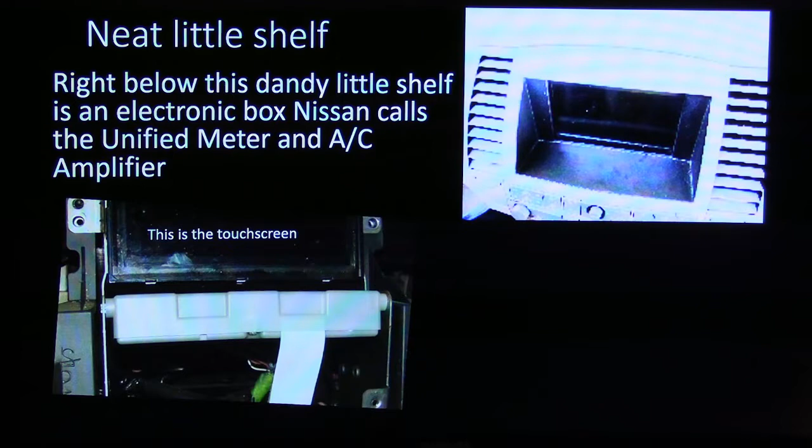Here's the touch screen, and when you pull this apart, there's this little very important electronic unified meter and AC amplifier box that's right underneath that screen, and facing up on that thing there, see, that's the meter. Now facing up there is a hole that's just the right size for a penny or a dime to fall through. It's funny because the Nissan mechanics for years called this thing the piggy bank.

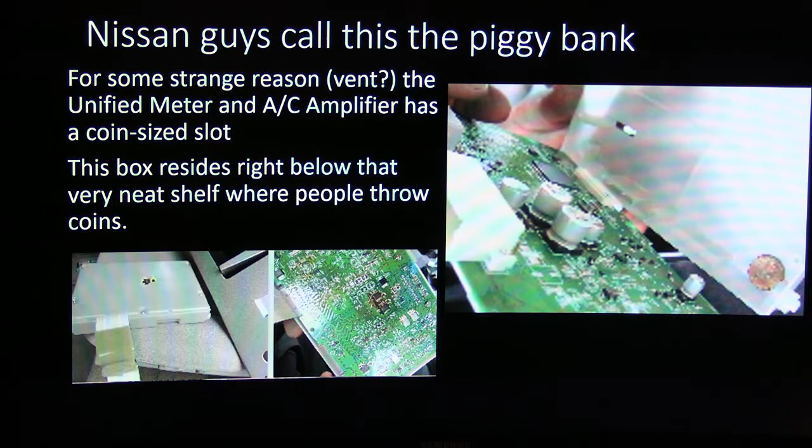That's where the coins like to fall. Now right below that little neat shelf, it's a perfect place for that stuff to fall through. And that's when it shorted out some of the circuits, and it made a burn place on there. You could smell it and all that. And there's the penny that was in there. That's a smoking gun in and of itself.

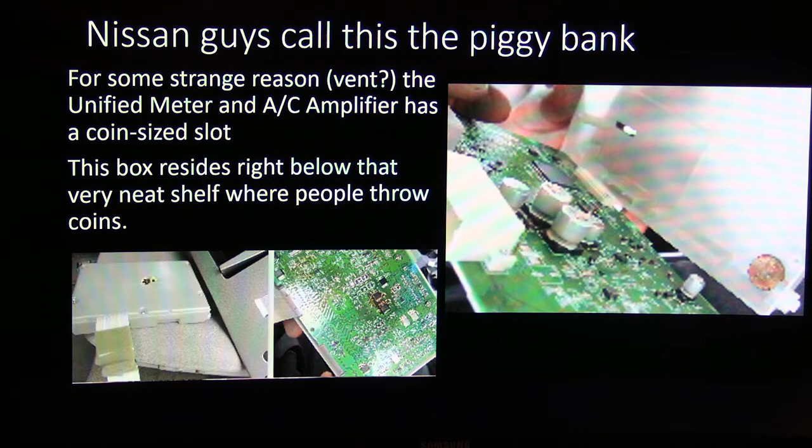Don't mind the pun. All right, so the replacement part comes from Nissan with a piece of thin cloth tape over that hole. I thought that was interesting. They knew that there was a kind of a problem there, so they went ahead and did that. It's a pricey repair. Only costs pennies to generate the repair, though, so to speak.

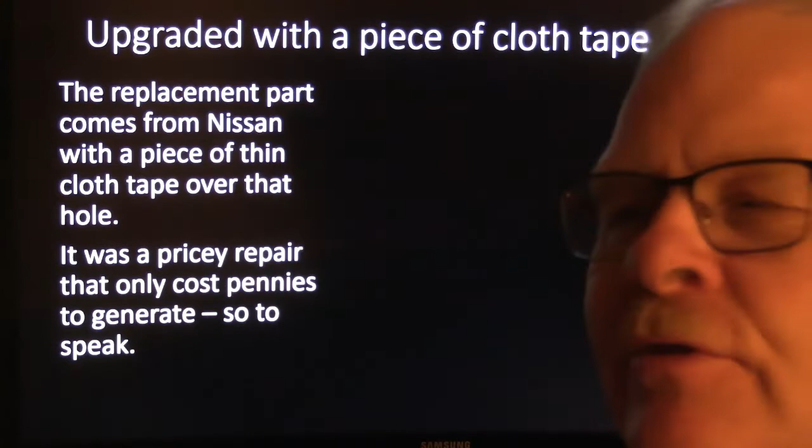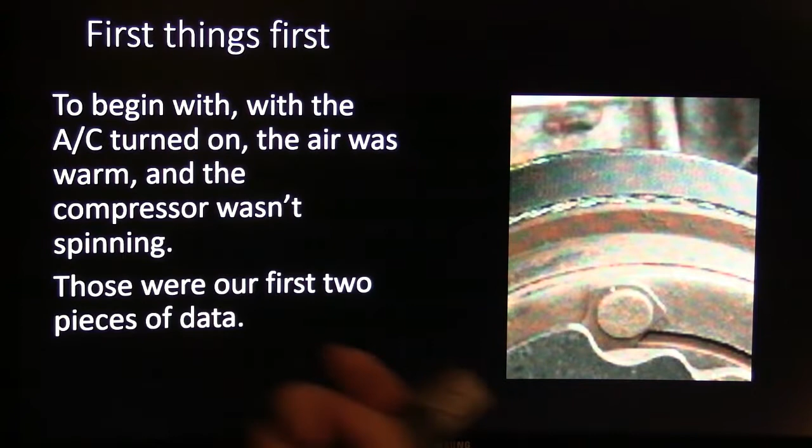Now, Terry called me one day to tell me his '07 CRV had an inoperative AC. He dropped the Honda off a couple of days later after I told him to bring it on in, and the AC had just died on him, just quit working. Sometimes they do that. And to begin with, we turned on the AC, the air was warm, the compressor wasn't spinning. That was our two first pieces of data.

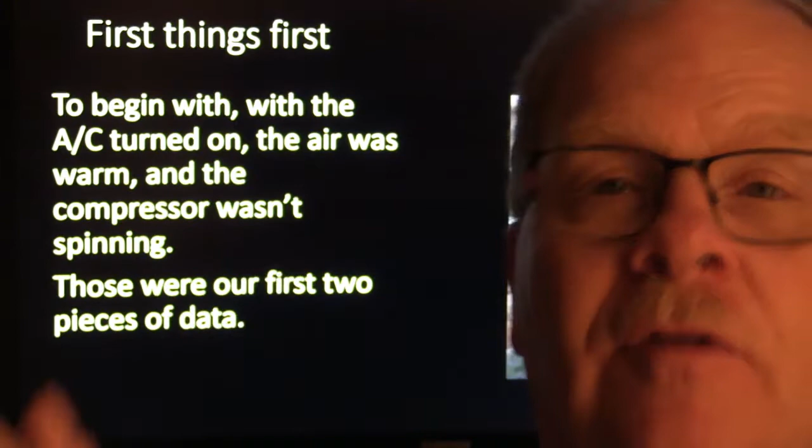See, every time we do troubleshooting, we're going to gather information, and we're going to sort it out, and we're going to see where it leads. It'll either lead us to a repair, or it will lead us to look for more data, and that's what we needed to do in this case.

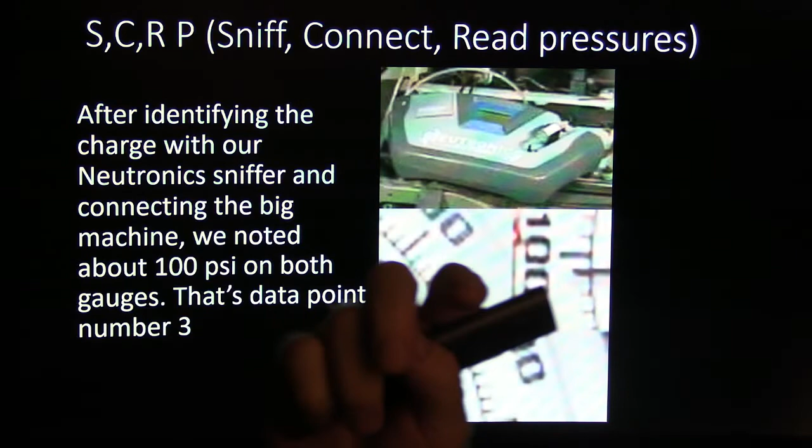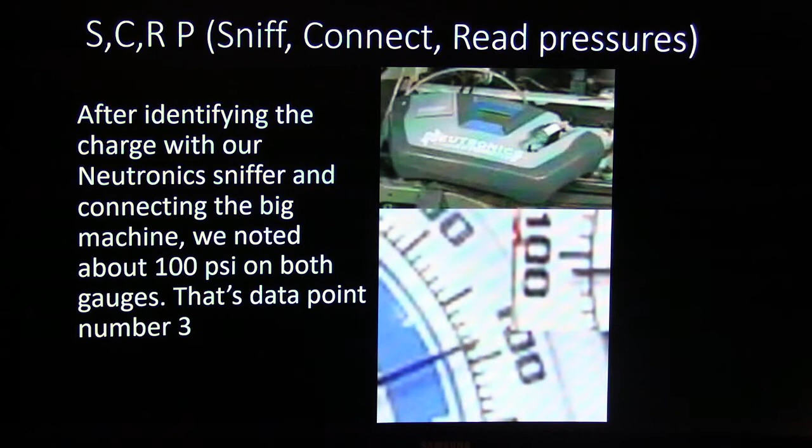Now, after we identified the charge with our Neutronics sniffer and connected the big machine, we pulled up about 100 psi on both gauges. That's data point number 3. So we knew that we're blowing warm air, we knew the compressor wasn't running, and we knew we had 100 psi of static pressure. Now the low pressure cutout switch should have allowed the AC compressor to kick on if it was good.

Alright, so now you will not see a schematic like this on this vehicle anywhere else on the planet, because I created this yesterday. What I typically do is I take pieces of the schematic as they're published and I actually move them around so that I can put them all on one page if at all possible.

So we eliminated a refrigerant problem, and our preliminary conclusion was the compressor's failure to engage was not related to low charge pressure. I should have said to move this to the back so that was wasn't hidden right there, and I see that now.

So basically we got our blower motor relay here. We've got the PCM measuring pressure here. We got the second ECT sensor there, and there's a ground here. See, this is both a PCM, that's why they've got the dotted boxes.

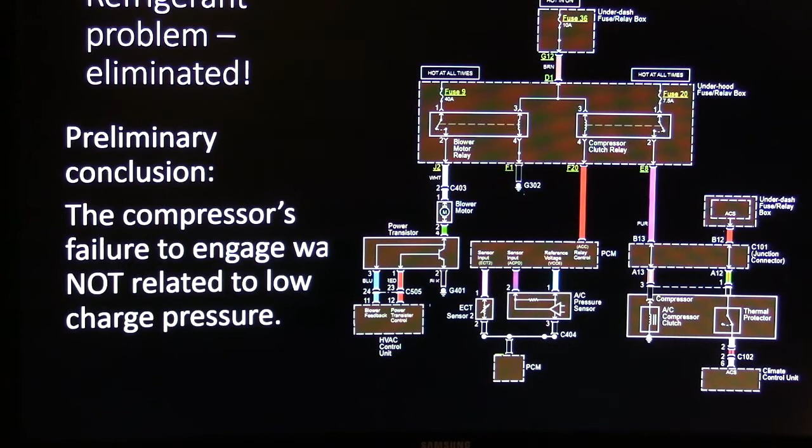And so the under dash fuse relay box goes through this thermal protector, the climate control unit, and so on and so forth. The climate control unit basically measures that. And there's your AC compressor clutch. And the diode that's usually there is not there in this particular case. But what we're showing here is that relay right there is supposed to turn on that compressor clutch.

And so, as I have talked about before, we went to find the relay. There's relays identified with snowflakes here, there's 2 of them. You're going to see that on that. See this right here? That's a fan, and this is a snowflake. These are ISO symbols, which means this is the radiator fan. This is the condenser fan.

And this is a symbol for a relay. And then there's another fan relay, probably the blower, I don't know. But see how crazy they are with these hieroglyphics, and some of them you're supposed to look it up in the shop manual because they didn't know how to draw whatever it was supposed to be doing. And you know, there's a rear window defrost, I guess, or whatever. But the point is, this snowflake was the one we were looking for, and that's the AC clutch relay.

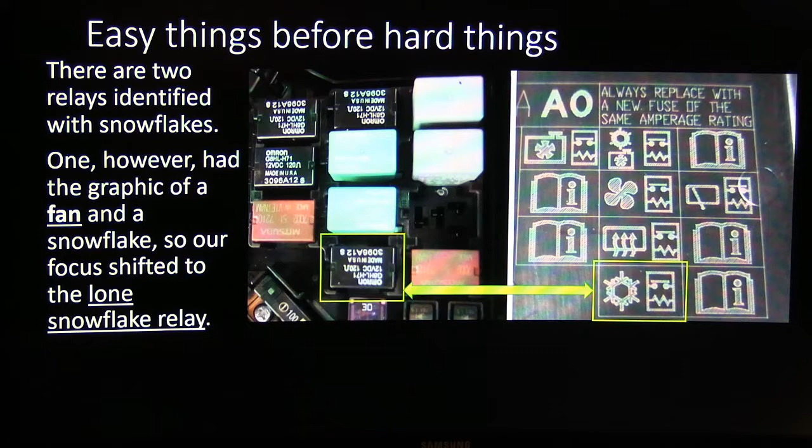So that's the one we went and found, and our focus shifted to that relay right there. All right, so what we did was we put our finger on it - that's my finger right there, by the way - to see if it would click.

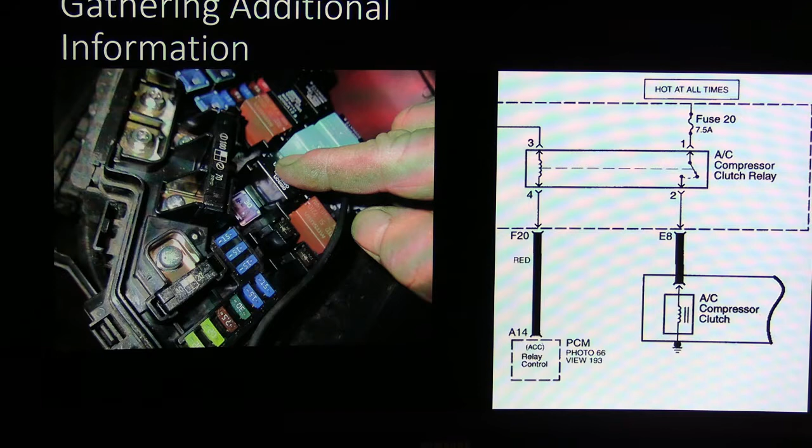A relay can click, and that doesn't necessarily mean that it's going to be putting the juice out. I built a relay test box one time that had a little light on it, and you could hook it up, plug the relay in, mash a button, and if it energized the relay and that light came on, you could at least know it would pull some current. But that's not really a good way to go, because if that relay is supposed to be pulling something like a 30 amp draw, and you just got a little quarter of an amp bulb that it's turning on, that's not really a good test.

And I've always told my students, you cannot say a relay is good just because it clicks, because a relay can click and have partially scorched terminals that are dropping almost all the voltage that's supposed to be going through it.

I was working on anti-lock brakes on a Taurus one time back in the late 80s or whenever it was, and I made the mistake of following the trouble tree in the shop manual, which in a lot of cases is a joke, but it would lead me to these little things that say measure the voltage here, and have me measuring the voltage coming out of the relay, and they said if that was over 10 volts then you were supposed to go on with your troubleshooting. Well, I measured it and it was like 10.5 volts, which, looking at the numbers on the page, sounded good, so I moved on.

You've got to recognize this was an anti-lock brake thing, and it had no load on it because it was reading 10.5 volts. But there was enough voltage drop at that relay that the 10.5 volts was not suitable to do what it needed to do, whatever circuit it was turning on in the ABS module.

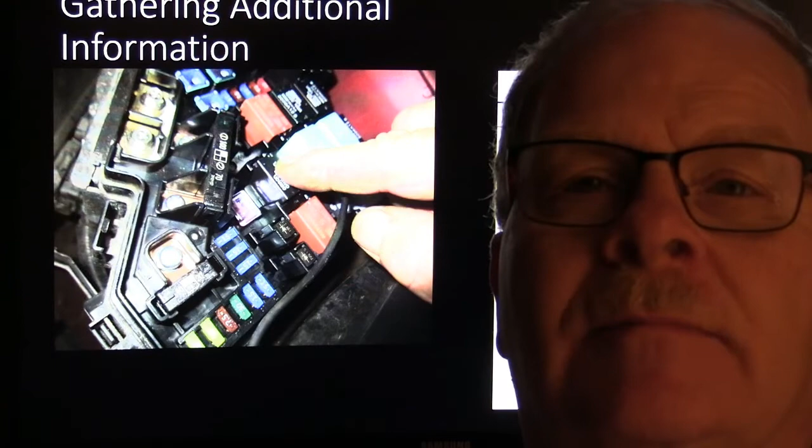But that was a ridiculous bunch of nonsense whenever they try to give you a certain voltage threshold to tell you if it's above this. Now if there's any kind of a load that relay's pulling, that little bit of voltage would not even have shown up, because it's going to drop it all if it's trying to pull any kind of a load anyway.

There was a little funny side note here. My buddy Donnie, back in the day whenever a lot of mechanics didn't even have meters, I had bought one from Radio Shack, and he had bought one from Radio Shack.

My meter sometimes would wind up reading gibberish on the screen. Just for the heck of it, I pulled it apart and saw there was this little 8-pin centipede chip in there with a number on it. I went to Radio Shack and found out you could buy one of those little chips. So I desoldered it off the board, soldered a new chip on there, and fixed my meter.

That same chip died about once a year. Finally I just put a little socket on there, kind of like you'd see on the old cal packs on your GM engine controllers. I bought a bunch of those chips because they didn't cost hardly anything, and whenever one crapped out, I'd just plug in another chip and get my meter back.

But Donnie was using the meter he had, like mine, and he was looking at a trouble tree like I'm talking about—that's what made me think of this. And the trouble tree told him to measure ohms on a live circuit.

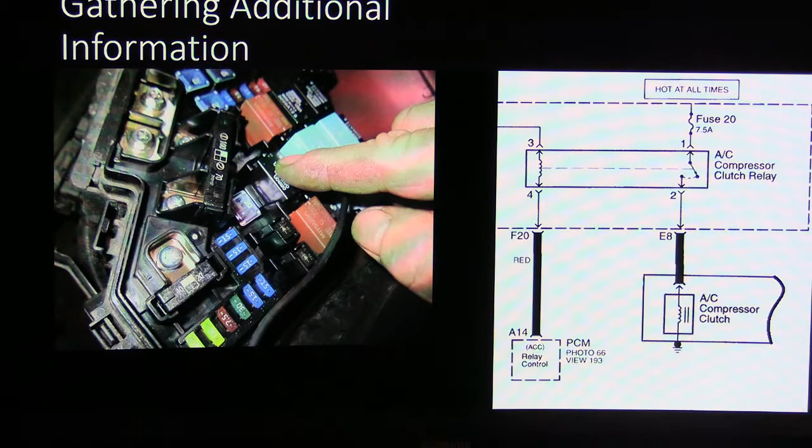Anyway, there's your compressor clutch relay, and there's your compressor clutch. So we pulled that relay out and went ahead and measured this. We got nothing—this didn't light up at all.

Now I've talked about this over and over again, but I'm looking for a test that's going to give me the most information with the least amount of steps, and this is an example of that.

So that AC compressor clutch—typically on most of these AC compressors, the ground on the other side is actually grounded right there on the compressor. In other words, you'll have a 2-wire connector plugged in there, and a lot of times you'll have a 1-wire connector plugged in there. This ground, like this one right here, is on the compressor housing.

So how likely are you to have a situation where the compressor itself is not grounded? That's just not likely to happen. If you had that kind of situation, like if your engine ground was bad, you'd have a bunch of other problems.

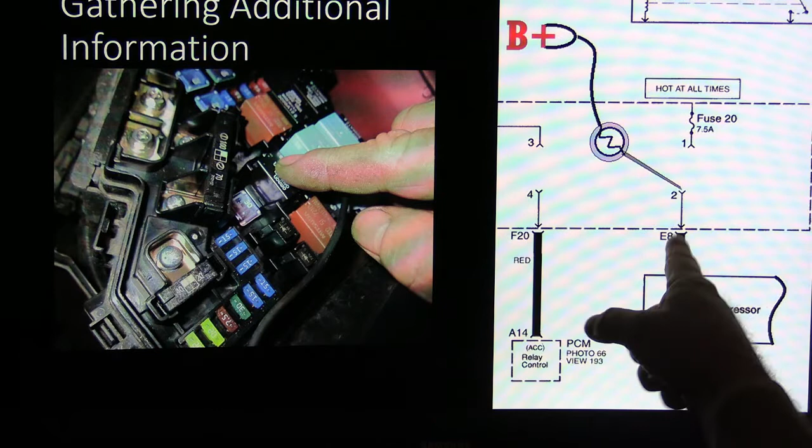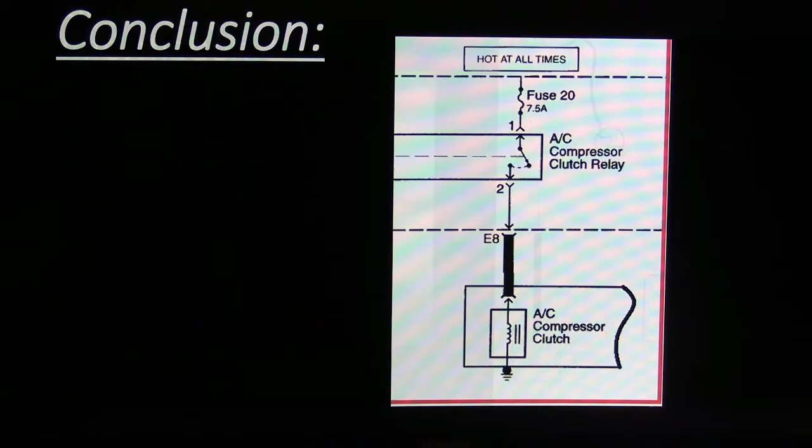So you either have a pin fit problem where it's spread out, a broken wire, or an issue with the AC compressor clutch here. But nothing had damaged those wires, and nobody had ever been there—this vehicle was pristine and hadn't been worked on by anybody else. You could unplug the connector, look at the pin, and it was in good shape. So we basically had an open compressor clutch coil. That's how we troubleshot it.

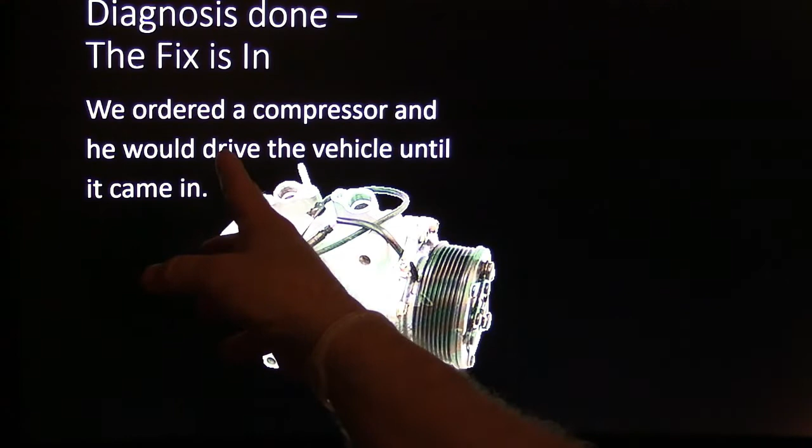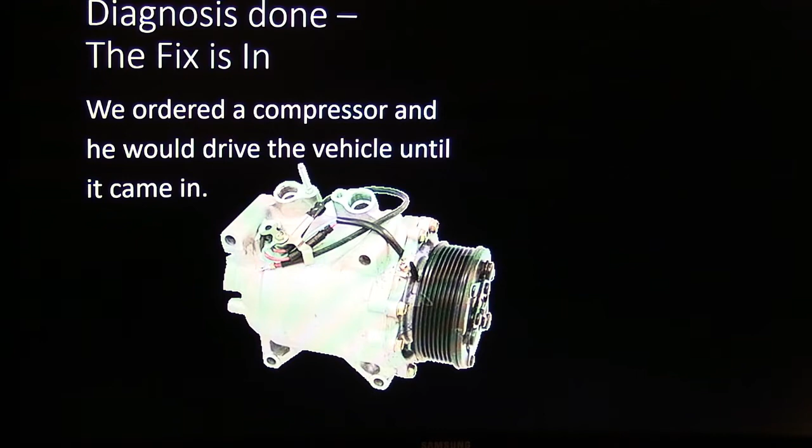We went the extra mile on that, so we ordered a compressor. We got that ordered, and he was going to drive the vehicle until the compressor came in. So that's what he did, and he was going to bring it back when it was time to put the compressor on.

Well, he called in the meantime while the compressor was on order and said his starter wouldn't operate, but everything else was normal. He was in another town about 15-20 miles away, so there was a shop there that checked it out. Apparently he told them we had been checking his air conditioner. He called back and said the shop claimed we hadn't plugged the starter relay back in properly.

Really? The starter relay's under here—we were working under the hood, but the starter relay is up right here, and that's basically what it looks like. The only reason that starter relay is there is so that whenever the transmission range sensor is somewhere besides park or neutral, the starter relay will be open. It's only allowed to close and carry juice to the starter when you have it in park or neutral. Otherwise, that relay is open and the starter won't work.

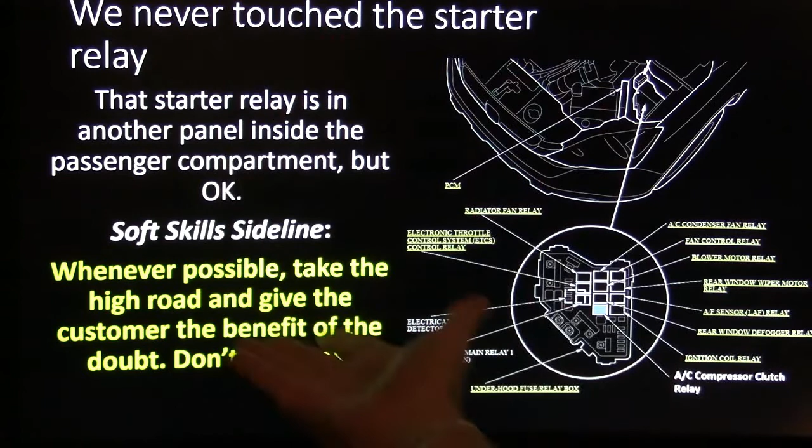I call that a starter cut relay. Anyway, I thought it was sort of silly that they would tell us we didn't plug it back in right—duh. So anyway, he went ahead and brought it back. We never touched it. This is what we were talking about here—that's under the hood, and this was the relay we were fooling with. This is where the relay is for the starter.

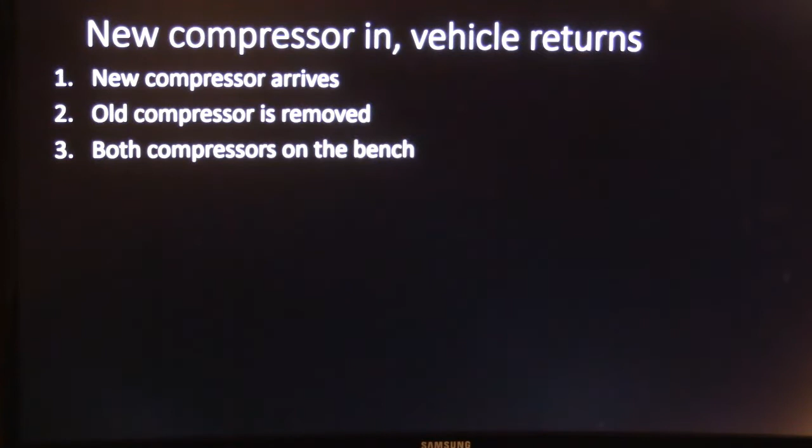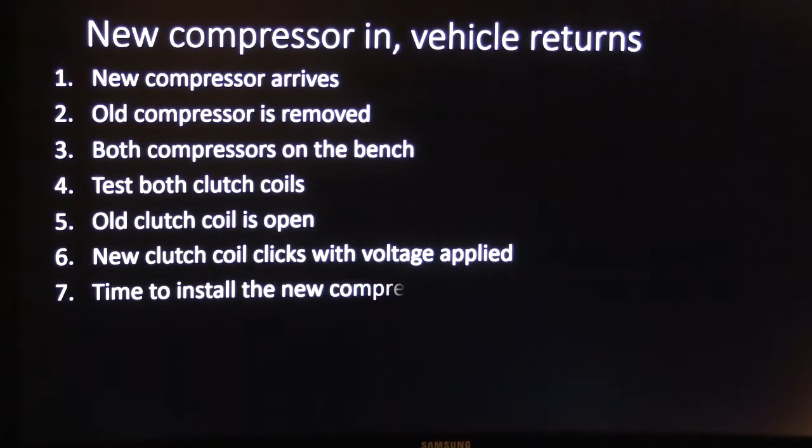So let's go on. All right, new compressor comes in, vehicle returns. We went ahead and pulled the old compressor off, and put both compressors on the bench side by side. We tested both clutch coils, and the old clutch coil was open for sure—we found that out on the bench. The new clutch coil would click; it would pull in when we applied voltage. And it was time now to install the new compressor.

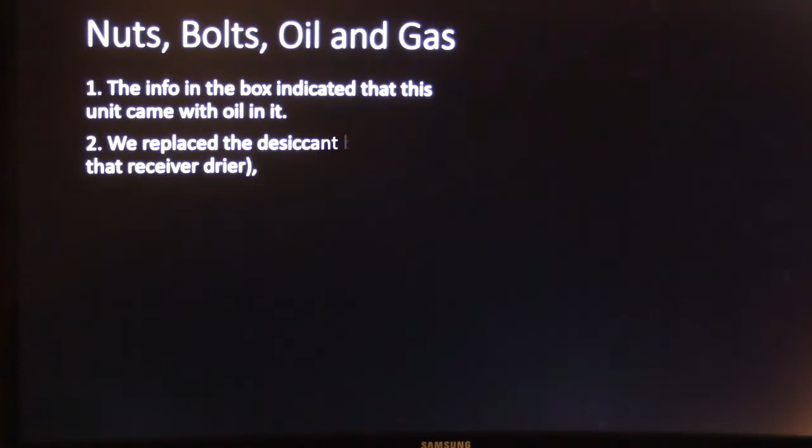So we went ahead and put the new compressor on there, and oil came with this compressor. That's one of the things I always need to know—does oil come in the compressor or not? Sometimes it doesn't, sometimes it does. Usually the little piece of paper that comes with the compressor will tell you if there's oil in there.

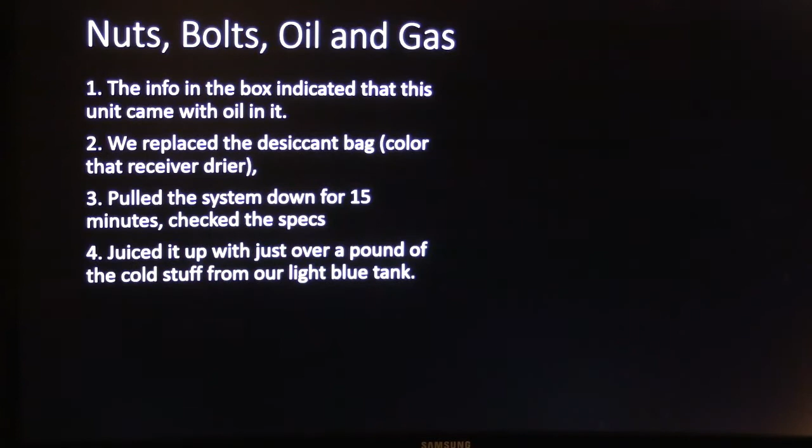We replaced the desiccant bag located in the receiver dryer. We pulled the system down for 15 minutes, checked the specs, and juiced it up with just over a pound of the cold stuff, because that's what it called for, from our light blue tank.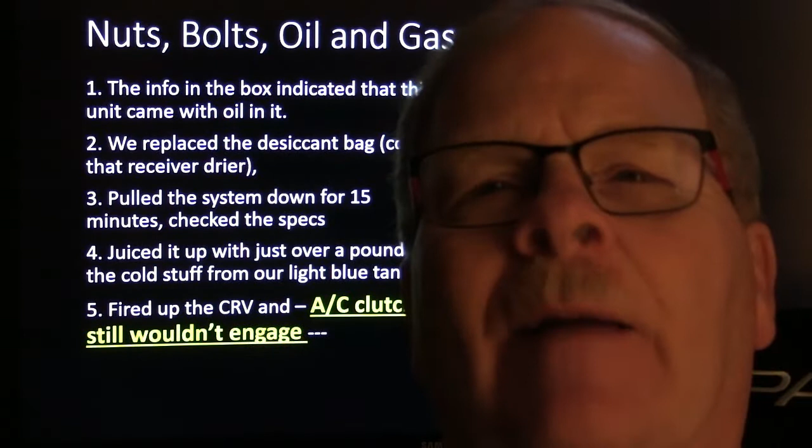All right, now we fired up the CRV and the AC clutch would not engage. Now what in the Sam Hill are we supposed to think about this? This is the craziest thing. We know what we have to do at this point is stop and reevaluate what it is we've already done and how we arrived at the conclusion we originally drew.

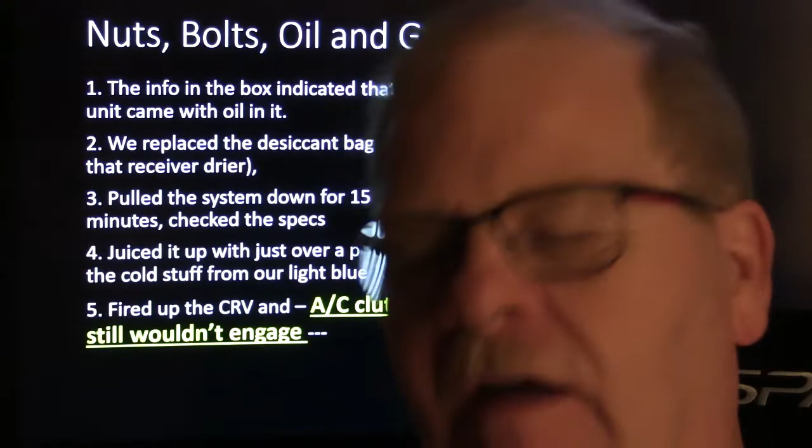Did we miss something? Okay, so what we knew to start with was that the clutch wasn't engaging and the coil was open. We verified the coil was open. I like to set both parts on the bench, and if I can, test both parts next to one another. In this particular case, I showed the students—I said, this is why we're replacing this compressor, and this other one, watch it click, click, it clicked.

This one wouldn't, this one would. Look at your meter—we got about 10 ohms or whatever it was over here. I don't remember what a compressor is supposed to have, but it ain't much. So we got very low ohms here, and wide open circuit here. Anyway, we already verified all that—we basically proved our point. We had everything ready to turn on the AC, but the clutch still wasn't engaged.

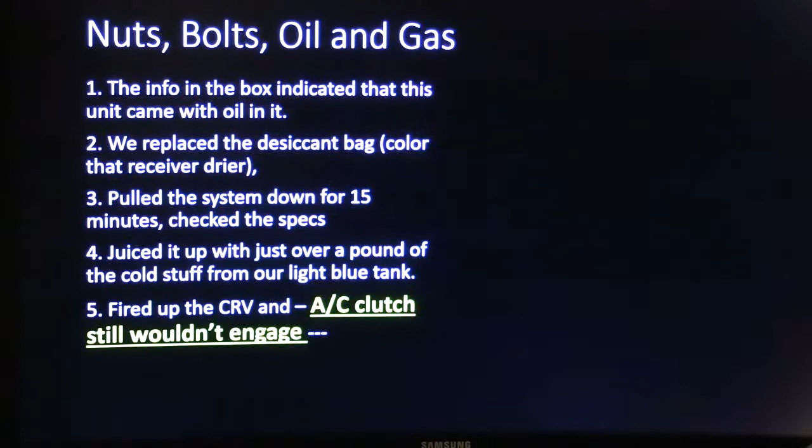Now, if you put a customer out there watching you do all this stuff that they don't fully understand, they're going to think you put a part on there that you didn't need, because they're saying, well, it wouldn't work before and it won't work now, so what are you trying to push on me? You can see how you'd fall into that trap.

One day this guy that drove a vending machine truck, basically refilled vending machines, came in. It was a 1-ton Ford with a big box on the back, and it came in on the hook. For some reason the driver came in riding with the wrecker. It was an old gas burner, a late 90s truck or whatever.

I went out there and pulled the coil wire and let it pop a spark, and it would only jump about a quarter of an inch. It needs to jump about an inch and scare the daylights out of you if it's got enough fire. I said, you got a weak ignition coil here, that's what's wrong with it. So I went and got another coil, put it on, fired the truck up, and everything's fine.

The guy says, well, I ran this truck out of gas yesterday and we had to get gas and put in it. Did me running it out of gas damage the ignition coil? I said, not hardly, but what you've run into is the same thing mechanics run into all the time. We fix something on one end of the car, and it's supposed to be our fault because something broke on the other end.

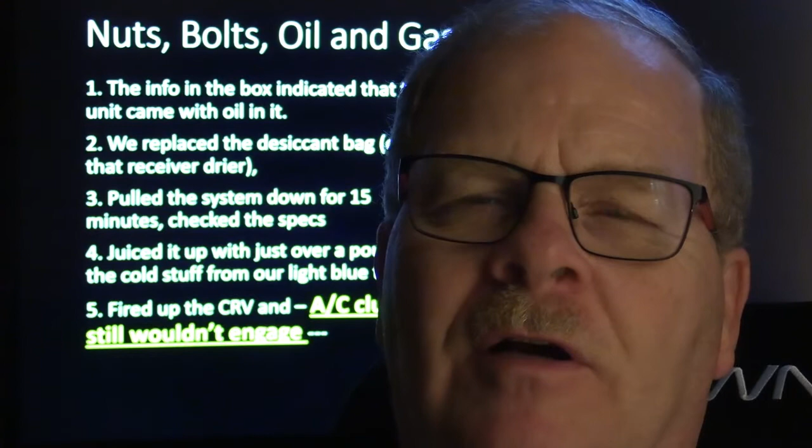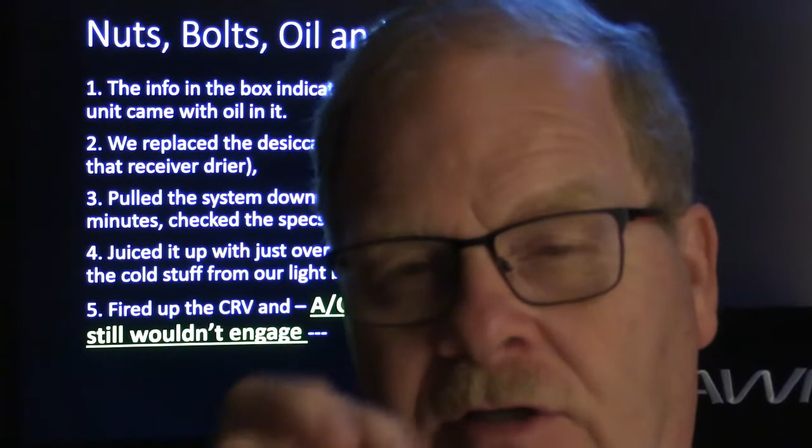There was a customer who used to come to the college to get work done on his 4-wheel drive Ranger. You've got to have a special puller to pop that hub off so you can even get the rotor off and the bearing out of there. You put this little thing in, hooks all the way around, then you use a slide hammer and it clicks right off. But you won't get it off without busting it if you don't have that special tool, and that tool costs $100.

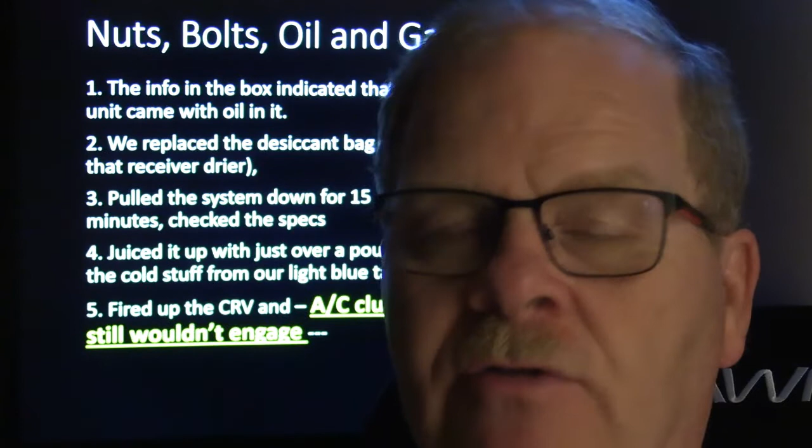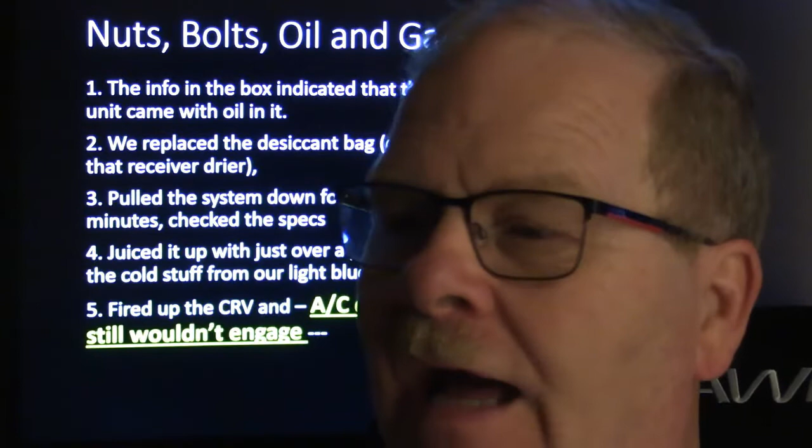I bought it, and I think that's the only time we ever used it. But the point is, we put brakes on this guy's vehicle - I don't think we even had an on-car brake lathe at the time, so I said we don't have any way of pulling this rotor off and machining it, so we're going to just replace the pads like it is, and we put the pads on there.

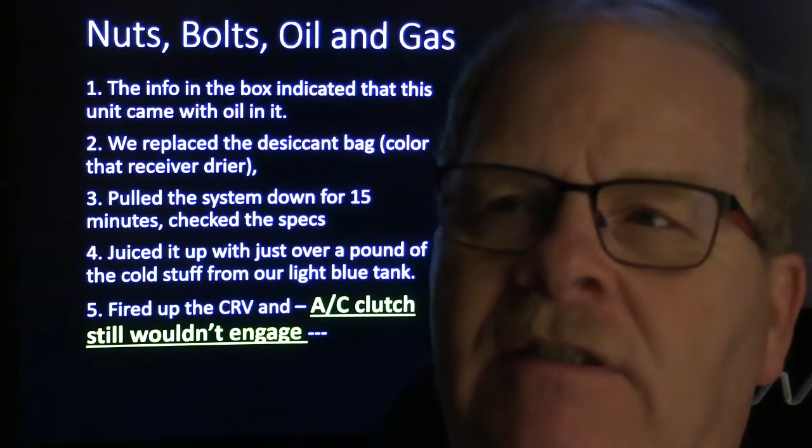This guy came back about two weeks later and says, I've got a noisy bearing on the right front, and it wasn't like that before y'all put those brakes on there. Every single time we worked on that guy's truck, he was trying to tie whatever went wrong next with what we had done previously. But there was no warranty on anything we did at the college anyway.

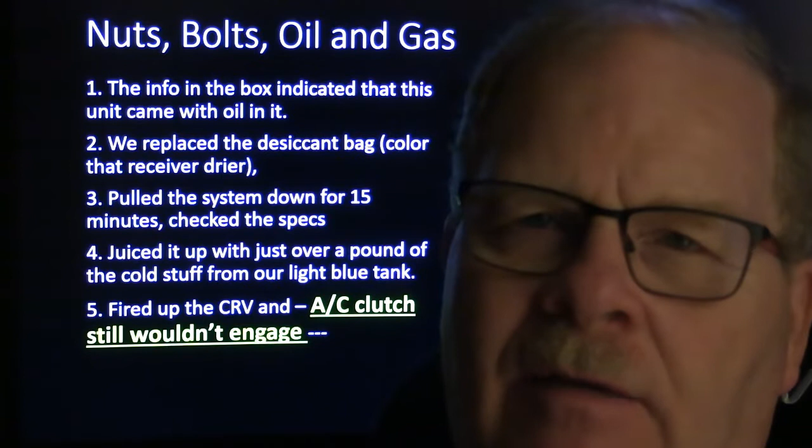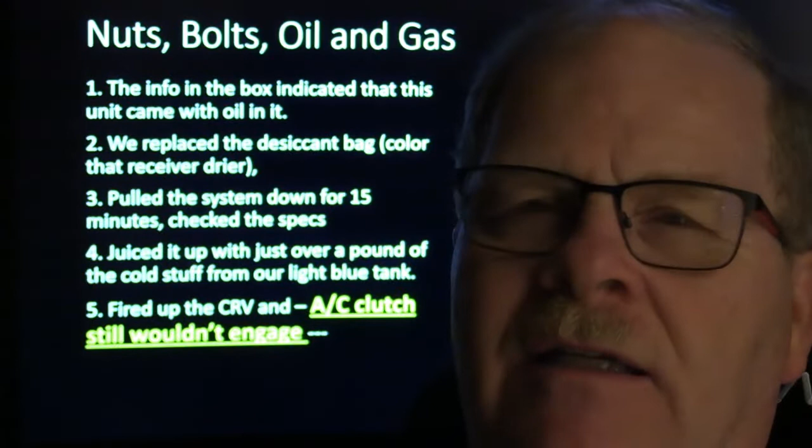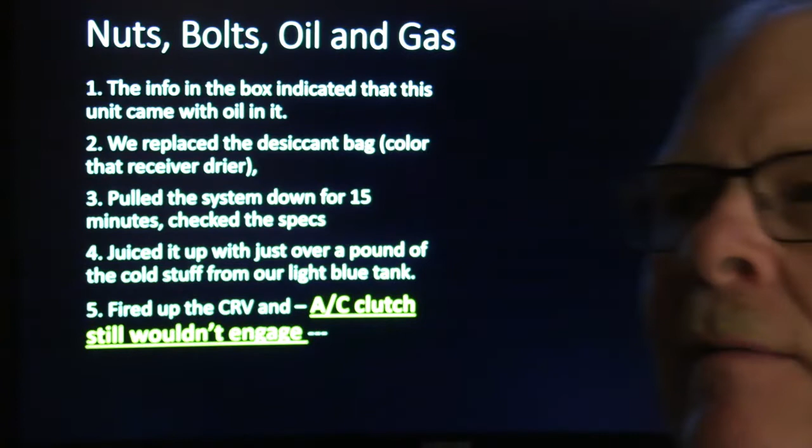Even so, if something we did caused a problem, I would usually go back and take care of it. This guy, I told him, look, I'm tired of you coming in here acting like everything that goes wrong with your truck is our fault, so you need to cut that out, or we're going to send you to a shop up the road. He calmed down after that, but that was ridiculous. He wasn't the only customer we had like that either.

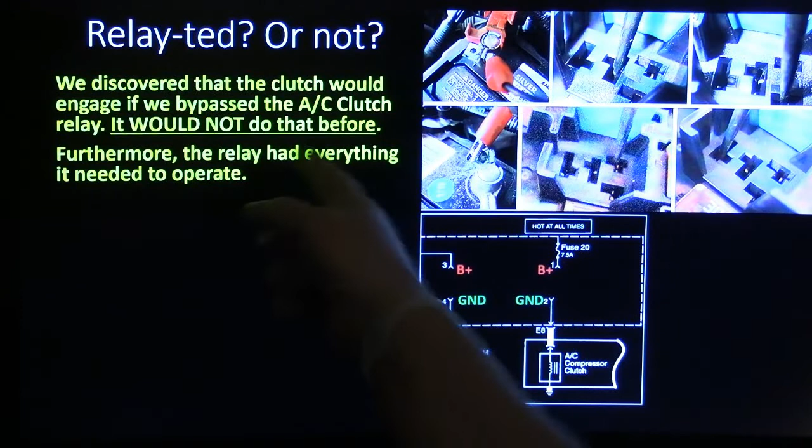So what in the heck's going on here? We discovered the clutch would engage if we bypass the AC clutch relay. That's your two big terminals right there - you're basically looking for a ground on one, power on the other. If you jump past that, I'd take my pocket screwdriver and ease it in. You don't want to shove it in enough to spread the terminal. You got to be really careful.

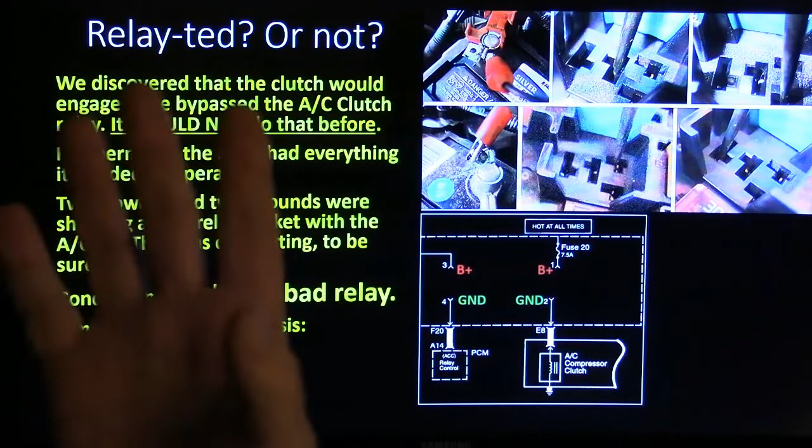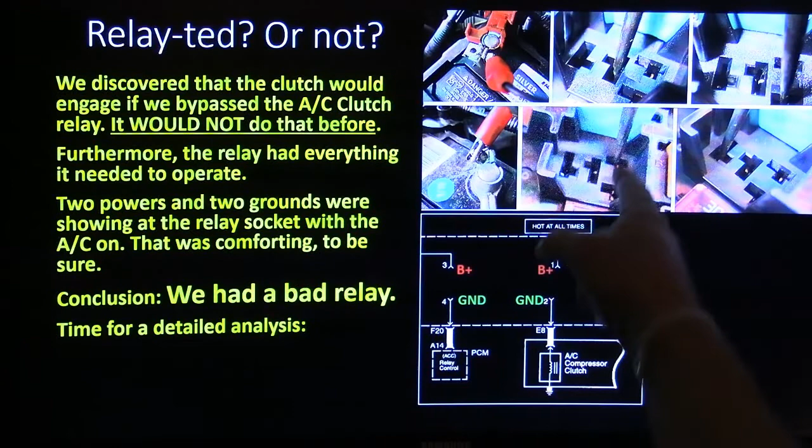You're just going to touch it. So I basically took that and brought it over here, stuck my pocket screwdriver and bent it over there. This is the coil. This right here is the load carrying terminals on those little relays like that.

So I bypassed it and the clutch clicked in and worked. We had actually done that previously. I didn't mention it, but we did, and it wouldn't click in before. Furthermore, the relay had everything it needed to operate. We had 2 powers and 2 grounds. We had everything going. We turned on the AC, the PCM had the relay coil grounded, and there was power going to the hot side of the coil, and the AC compressor clutch had a ground there. So when you've got 2 powers and 2 grounds at a relay like that, and everything's turned on and it's supposed to be running, you know you've got everything you need right there at that relay socket. Conclusion was we had a bad relay.

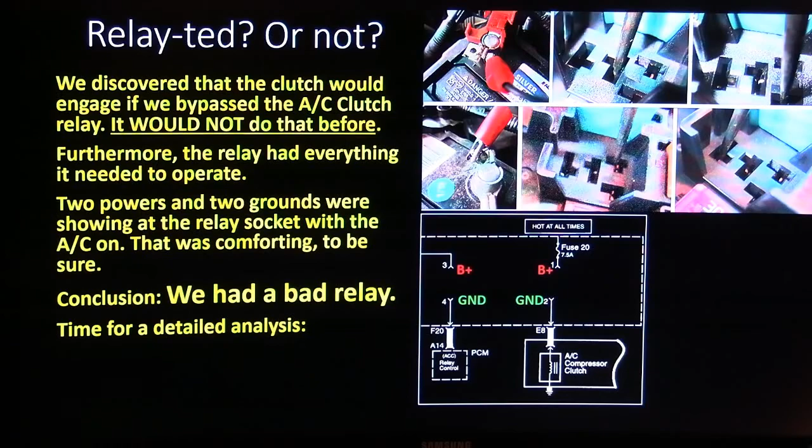Now it's time for a detailed analysis. We got to backtrack. We had never checked the AC relay's integrity to begin with because we found the clutch coil open. Why check the relay? I guess we could have checked it just on general principle, but I was thinking, what's the point?

In bench testing the clutch coil on both compressors, we verified our original diagnosis was sound. I said that earlier. But you got to recognize the fact that we didn't anticipate both the relay and the clutch coil would have failed together. Makes you wonder which one of them failed first.

That doesn't make any sense. Now, if the clutch coil had shorted out, it could have destroyed the relay, I guess. But it seemed like it would have blown a fuse, though. But it didn't. It was an open, it wasn't a short.

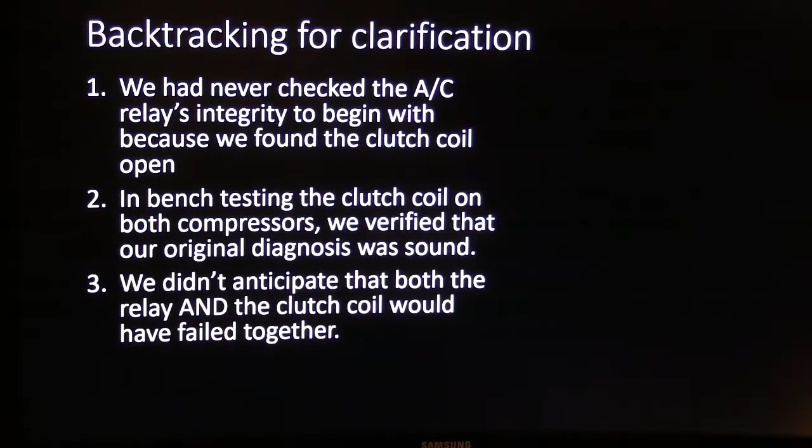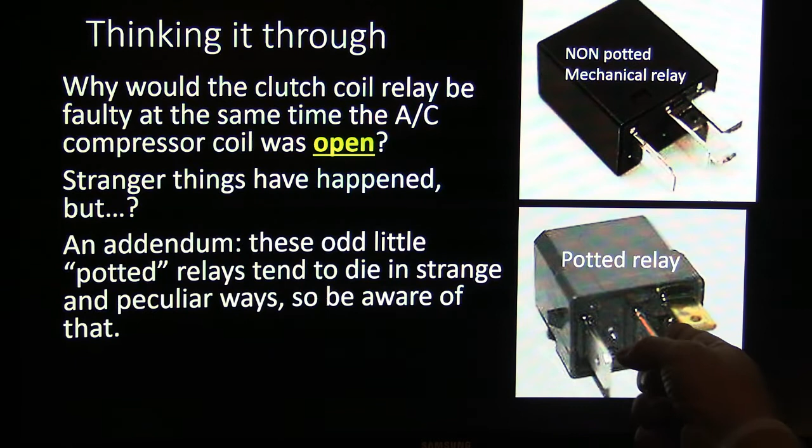All right, now this is a non-potted mechanical relay, and this is a potted relay. Now, the potted relay, I don't know, I've never cut one of these apart, but these potted relays have some electronics in them that these don't have, and I've seen these relays. I think I mentioned one time before a Nissan Altima we worked on where the blower motor would not kick on until 5 minutes after you turned it on.

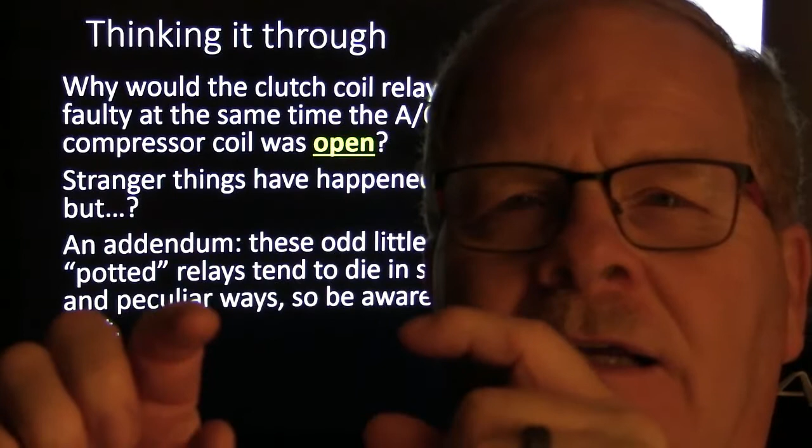In other words, you could turn it on and drive for 5 minutes, and this was in the wintertime when it came in, the lady was saying she was freezing to death. But the blower motor, after 5 minutes, would come on. So we went in there, and the rear window defrost relay was the same kind of relay. So we pulled the blower motor relay out, and put the rear window defrost relay in that same spot. And it worked perfectly. I mean, the first time you turned it on.

The guy that did that job went to work at the Nissan dealership, and he says he ran into one of those, and it didn't even take him 10 minutes to figure out what was wrong, and the service manager was real impressed with that because he had already seen it one time.

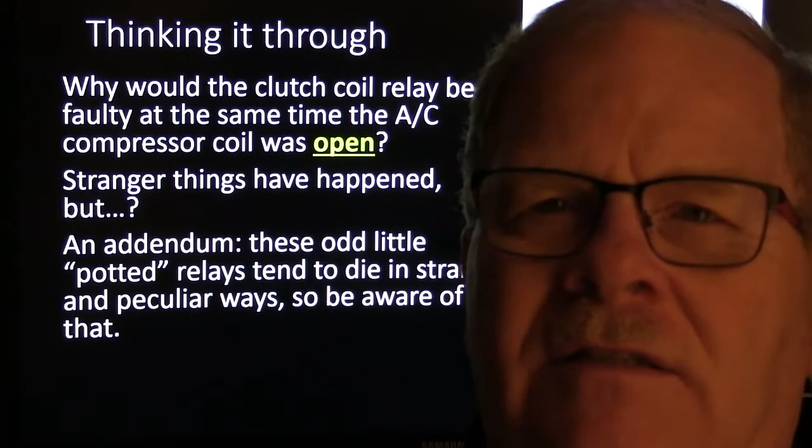It was apparently, but these potted relays, what I was getting at is, if you got one on something like a Nissan, I like to use the Nissan relay rather than just guessing and sticking another relay in there and seeing if that will work, because sometimes you can destroy stuff like that. This potted relay right here, they do crazy things and die in peculiar ways that you may not see on a non-potted mechanical relay.

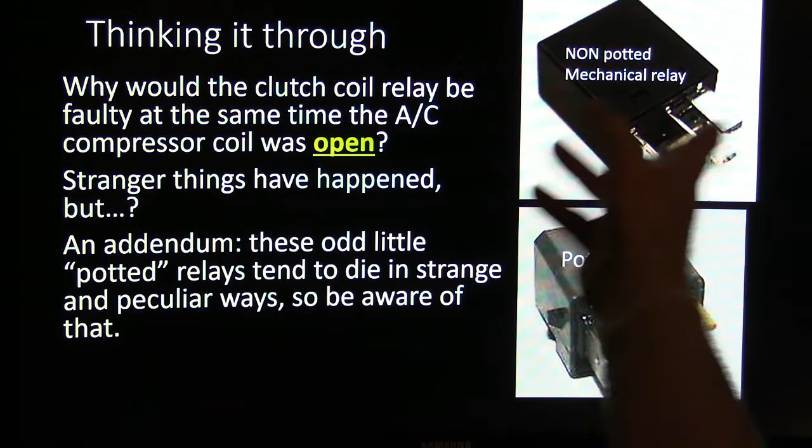Typically, if one of these relays ever closes, it's going to carry the load until the next time it closes. That's not always the case. Sometimes one of these relays can fail while it's carrying the load. It can get, I've seen that happen, but not very often. Usually if they close, you're good until the next time they close and they don't work.

So, would it be too far out to wonder if the shop who checked the starter relay might have swapped the starter relay with the AC relay, because they were the same relay as far as I knew? What are the chances they would pick that particular relay from the underhood box when they were working in the underdash box? Now that doesn't make any sense either, but some mysteries aren't worth solving.

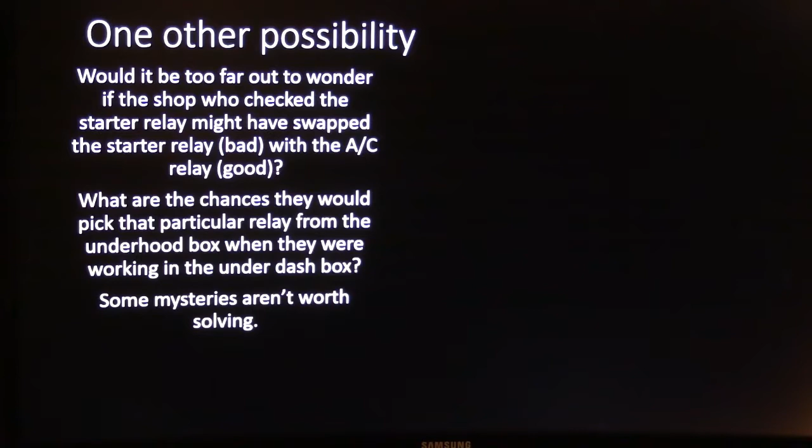You know, suffice to say, his starter worked and his AC worked when he left, and that was a good thing. The replacement relay from Advance Auto Parts closed the deal on that one.